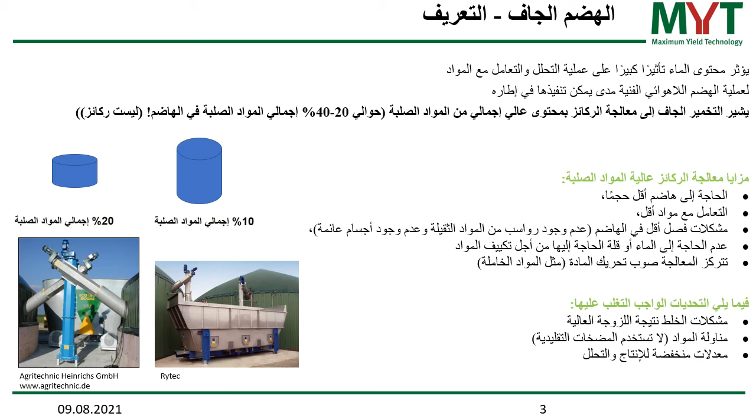Coming to the next slide, we have an overview over the two major technologies in dry digestion. The one thing is the so-called batch mode systems. Batch mode means you feed the substrate into a reactor and let it sit for the digestion time. The opposite of this is the continuous mode. In the continuous mode, you have a constant feed into the system and a constant output out of the system.

In the batch mode, of practical relevance, plants we have seen in a certain number in technical applications are systems with percolation. This is the so-called garage style digester. So you feed the substrate into a garage and percolate a liquid over it. The liquid trickles through the substrate and is recirculated again and again in order to enhance the anaerobic degradation

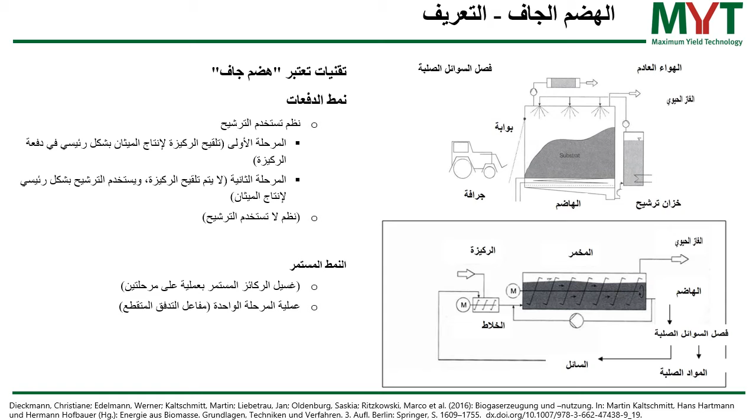Continuous mode, we have several relevant systems. Two-phase process with continuous washout of the substrate in a plug flow system has been developed, and I think there was a pilot plant, but it never came to a lot of installations in full scale. But the one-phase process plug flow reactor for organic waste, this is a very common system, and I will introduce that to you in following slides.

We have most common substrates. As I already said, total solid content is a very important point here. So mainly substrates with a high total solid content are used in anaerobic digestion, dry fermentation systems. Very common it is for separately collected organic fraction of municipal solid waste. So in many countries we have a bin in the households where organic waste is separately collected, and then this material has a high total solid content and can easily be digested in a dry fermentation system.

There is also an application, in particular in Germany, for a fraction of municipal solid waste. So there is a treatment of municipal solid waste. It's shredded and then it's sieved, and a certain particle size contains a lot of the organic material, and this is being stabilized prior to landfilling, prior to deposition in a landfill, in order to avoid biological activity on the landfill. And this organic material you also can digest, and dry fermentation systems are reliable technology for this biological stabilization.

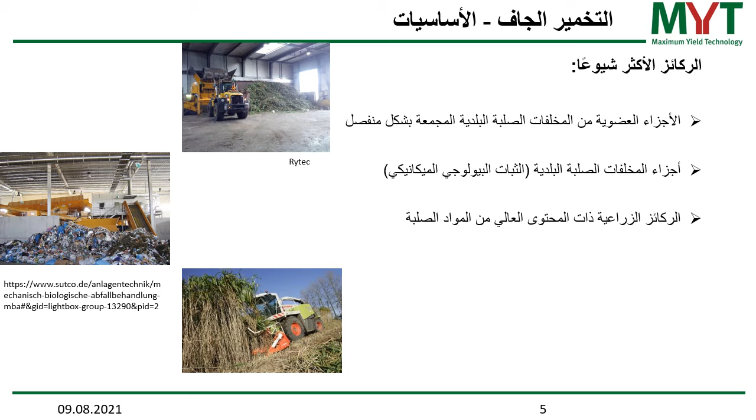Limitation of the total solid content is usually said to be around 40% total solids, but I would like to highlight here that this is not only the total solid content, which is then available in higher concentrations. There are also other substances which are in the substrate in elevated concentrations once you reduce the water content.

Last but not least, total solid concentration in the substrate and total solid concentration in the digester are two things. First of all, you have a degradation process which reduces total solid content. So you have a fraction of the organic material which goes into the gas phase via the biogas. So you lose total solid, which increases the water content.

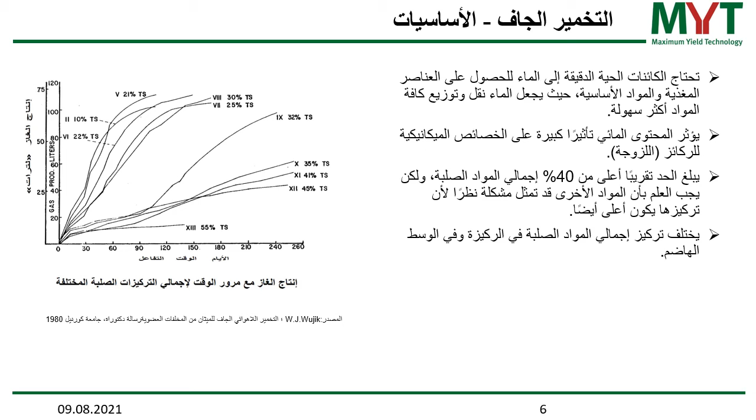On the next slide, I would like to show you also this fact, what I just mentioned, that also other substances concentrate if you have a low water content. One of these is the ammonia concentration. Ammonia is actually a degradation product of any organic nitrogen in the substrate. So any plant material, but also manures, contains organic nitrogen. And once this is degraded, it turns into ammonia.

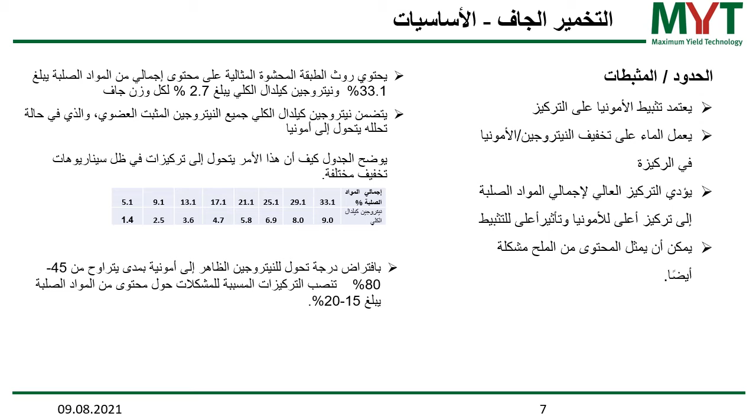Another point here is salt content. In some substrates we have concentrations of salt, and there you also have to check what impact dry digestion would have on this concentration and if this would result in inhibitory conditions.

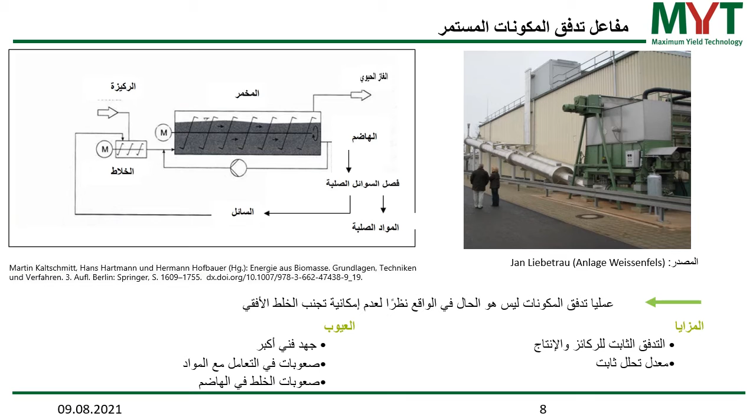You might also have issues with mixing the digester. There are several systems, therefore; if we look at the next slide, you can see that there are systems with the mixing on the lateral axis, and also a mixing system where the axis goes straight to the long side of the digester. And you can imagine that to keep such a mixing system really stable and not have a lot of movement of the system during mixing is quite a challenge for the process engineers. However, both have advantages and disadvantages. They are both available and tested in full scale, so I couldn't say that the orientation of the mixing system is a huge issue on these systems. It's just that there are two different systems available.

The material of the digester is also available in different systems. You can have them in steel or in concrete. The pictures you can see here, they are in concrete.

And usually these systems are operated in a very narrow total solid window. This is in order to avoid sedimentation processes. That's why the total solid concentration is kept quite high. And it shouldn't be too high, because then you get issues with the mixing, with the substrate transportation, and also with the release of the gas out of the digester medium.

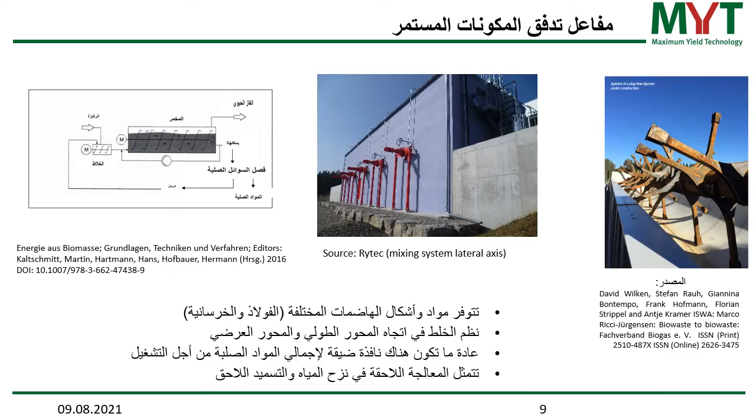When you look at the continuous plug flow reactor in regards of the relation of total solid content, hydraulic retention time, and organic loading rate, you can see that, of course, the higher the total solid content and the lower the hydraulic retention time, the higher the organic loading rate. Make sure that once you calculate that you consider your digestate recycling, or your recycling of the liquid fraction of the digestate after the dewatering process.

And other than standard chemical processes where you can put together the basic materials and then they react simply in such a plug flow reactor, the issue of a biological process, or in particular of the anaerobic digestion process, is that you need to have a mixture of methanogens in your initial feed in order to avoid acidification. If you have not enough methanogenic microorganisms in your substrate and you have a plug flow, then your digester would simply acidify, and this would lead to a collapse of the process.

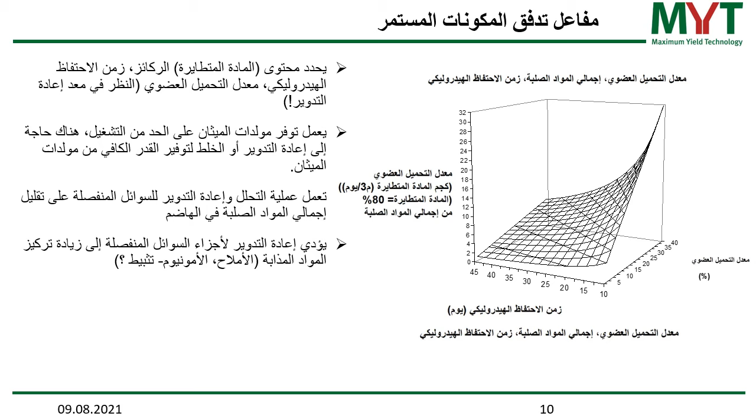If you have a recirculation process, you also need to pay attention to the fact that in the liquid fraction, then you accumulate dissolvable materials. This can be salts, this can be ammonia. You have to pay attention to that because it adds to the problem of inhibition, and that's why you have to check on this occasionally, and/or at the very beginning, maybe in the planning phase, you have to do some calculations how these concentrations actually increase.

Here we have a continuous plug flow system, an application which is offered on the market by the company Dranco OWS Systems. This is the only company who is offering such a system, because it's a vertical plug flow. The substrate is mixed with digestate and then pumped to the top of the digester, and is then sinking simply forced by gravity to the bottom of the digester, and it's taken out at the bottom. Then a fraction of it is removed out of the process, and the other fraction goes back to be mixed with fresh substrate and fed back to the top of the digester.

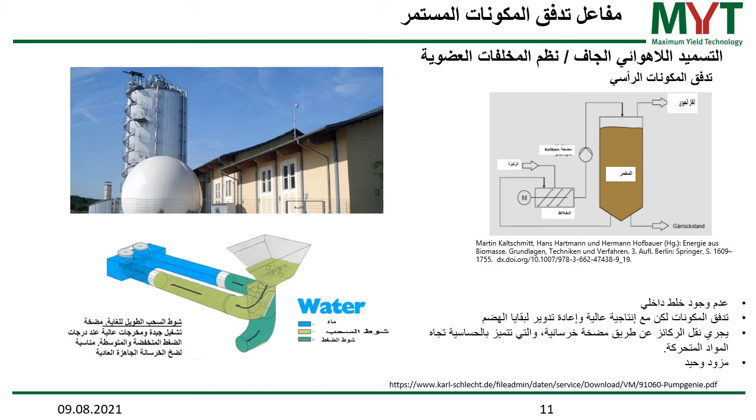There's no internal mixing in this process. There's a high throughput, simply due to the fact that you have to add digestate and fresh substrate. And the only substrate transportation is done by a piston pump. And these pumps, as I already said, are usually used for concrete pumping, so they are quite insensitive to disturbing materials. As already said, this vertical system is only provided by one company. There are quite a lot of applications worldwide, and this is, at least for my understanding, quite an interesting application here.

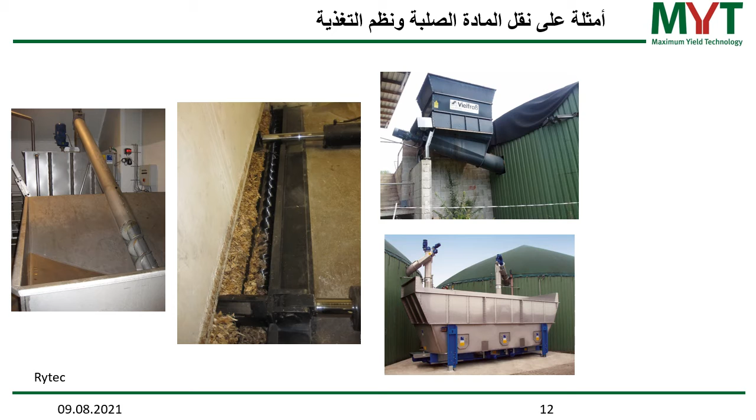The continuous plug flow reactor, to sum up a little bit and to give some general considerations here: we have substrate pumps to handle the material. This is quite a challenge. We have a high energy demand for pumping and mixing due to the high viscosity of the substrate. However, high total solid concentrations allow a high loading rate and then also a very high specific methane production rate

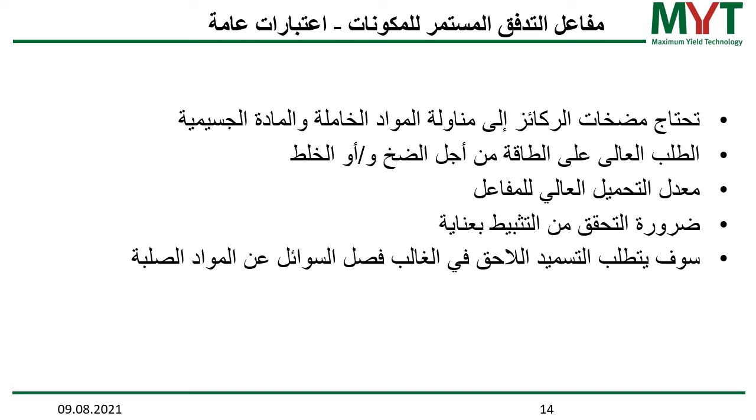from the digester. You need to check on inhibition, which substrates are in your substrate which might be inhibitory. And the post-composting will often require solid-liquid separation, so make sure that you have a plan for your digestate if you consider to build such a plant.

Second technology I wanted to introduce to you is the batch digestion system. As already said, the batch digester is fed to a reactor and then left for the digestion time, and this has the consequence that you have a discontinuous feeding, you have a discontinuous gas production, and you have a discontinuous output out of the system. So you need to make sure that this is considered for your overall plant operation.

So the substrate goes into the digester. It can be mixed with digestate, it doesn't have to be. However, it's fed to the digester, then the digester is sealed, then your percolation process starts, and in the first phase you have gas produced, which is mainly CO2, and this gas cannot be used. And of course you have a lot of air in the digester in the first place, so you have a gas where you have to consider what to do with this.

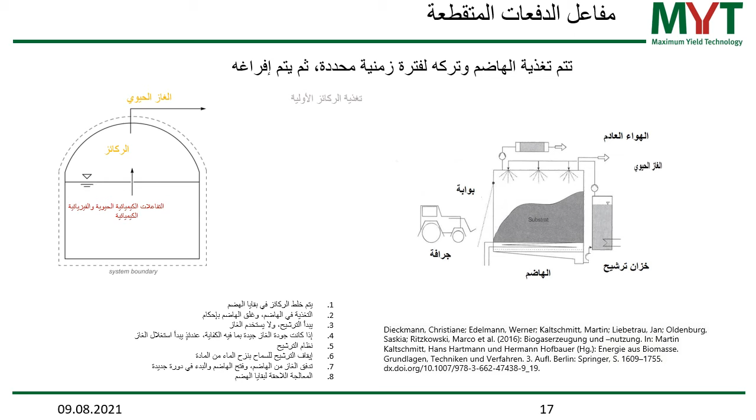Advantages of this system: it's a very simple system. You need a wheel loader and several garages in order to treat the substrate. Consequently, the technical requirements are quite low. This also means you have lower investment costs. You have a defined and guaranteed retention time, so there's no mixing of the substrate and maybe short circulation out of the digester, so every particle is a certain period of time in the digester.

Since you transport your substrate only with a wheel loader, there is no problem with any disturbing materials, stones, metals, whatever, no problem. And you also can separate substrate batches. So once you have maybe inhibitory substances in one batch, or you have some toxic substances in a batch, the problem will usually only occur in this very specific batch. The other garages won't be affected by such a problem.

Disadvantages: you have no continuous flow of the input material in biogas, so you have to store substrate, you have to wait until you can feed it in, so there's no continuous processing. You don't have a perfect contact of microorganisms and substrate as in a fully mixed system. You have reduced mixing, and you have also only limited opportunities to control the process.

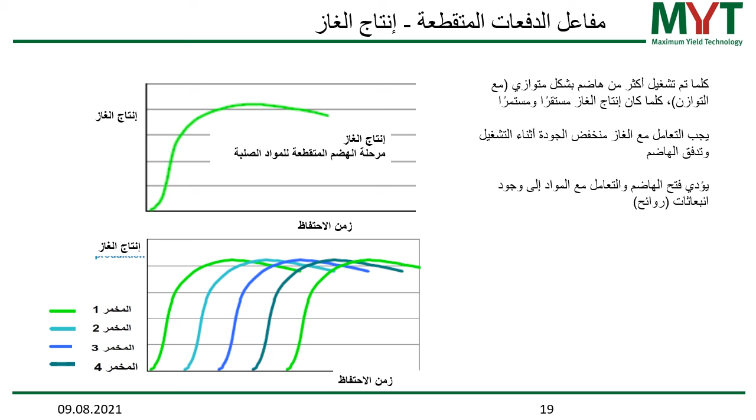As already said, the handling, opening up, closing of the digester leads always to gases of lower quality and might also lead to emissions from the process.

To sum up with the selected technical details here on the batch reactor, any substrate has a certain water holding capacity, and the percolation leads to a certain uptake of water until this water holding capacity is reached, and then the water is not stored inside the digester, it's percolating through. So make sure you have an idea how much water your substrate will take up before it starts to give away the water again.

Structure material is needed in order to have an effective percolation. So only if you have a certain, stable porosity, then the liquids get through. And make sure that compaction by the weight of the substrate itself is not too high, and that the liquids are getting through.

Technology options you have from certain providers usually vary in the size of the percolation tank. So either the percolation strategy is to remove acids as fast as possible, or the second strategy is to enable methane production as quick as possible in the digester. Some technologies also include aeration and composting in the garage. Again, make sure that your substrate characteristics and your structure actually allow such a processing.

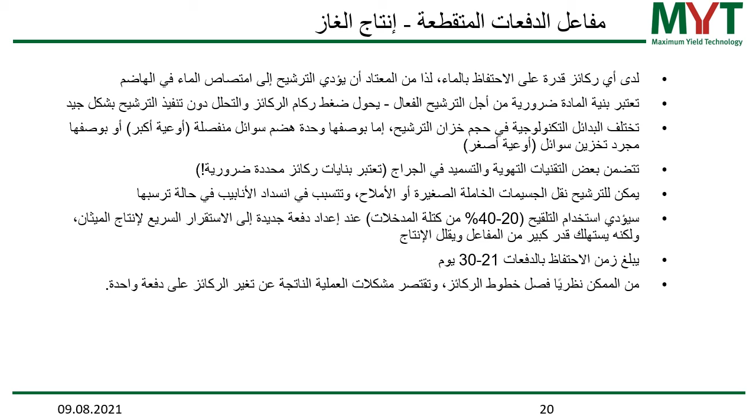Batch retention time is usually 21 to 30 days, and theoretically separate substrate lines are even possible, and the advantage I already mentioned is that process problems resulting from substrate changes are limited to one batch. There are many providers and process variants with different percolation strategies.

This technology is only applied within the treatment of separately collected municipal solid waste. And in the agriculture sector, this technology is not very common, simply due to the fact that you can treat these agricultural substrates much easier in other systems.

Post-treatment of the digestate is usually post-composting. There's not always a dewatering step necessary, but you might think of adding some structural material after the anaerobic digestion process.

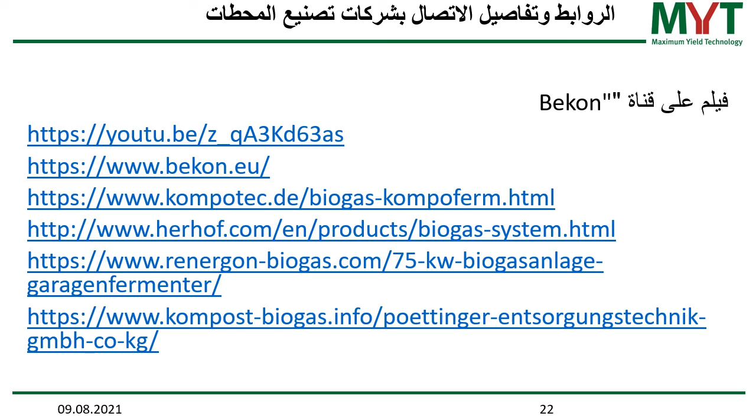And Bekon is one company; Kompotec, Herhof, as you can find here, are all providers of these systems. Pöttinger, yeah. So if you are interested, feel free to check out these links here.

Post-treatment: as already said, dry digestion is closely linked to the post-treatment. Usually in Europe, the standard treatment of organic material in the past was composting, and consequently most of the systems today are a combination of anaerobic digestion and composting processes. And that's why the main post-treatment process for anaerobic digestion is also composting.

And composting can be used for hygienization, because you reach temperatures above 50 degrees in a compost heap if it is well operated. And then you have the necessary hygienization of your substrate, of your digestate. You have also a certain water reduction due to the convection of air through the compost heap. Due to the temperature, water is actually forced out of the compost heap.

But you, of course, need to have structure, and you have to make sure that oxygen is getting into the compost heap; this is an important factor here. Otherwise, you will simply continue to have methane production in the composting heap, and that would lead to very high emissions, which has already been proved by some research activities. Afterwards, composted material is usually sieved, and then you have a high quality compost.

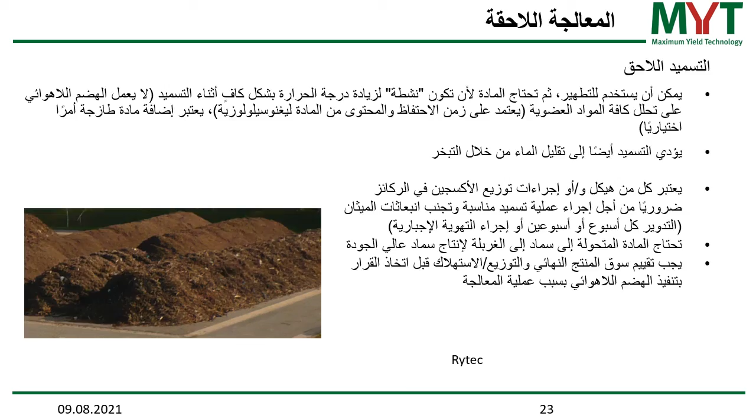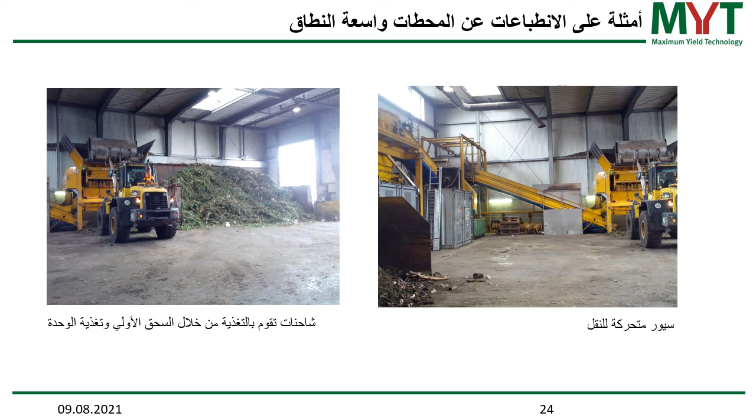However, the quality of your input material into your digestion process rules the quality of the output material. So the cleaner your input material is, the cleaner your output is. So the major target should be to really reduce disturbing materials in the input material.

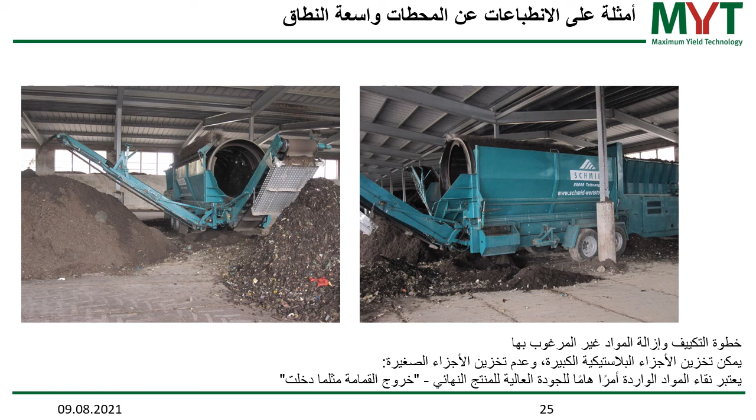Again, we have some impressions of some full-scale plants here. You also can find them in this brochure from the German Biogas Association. I don't want to read all these details here. Please check out in the brochure or here on the slides the major conditions.

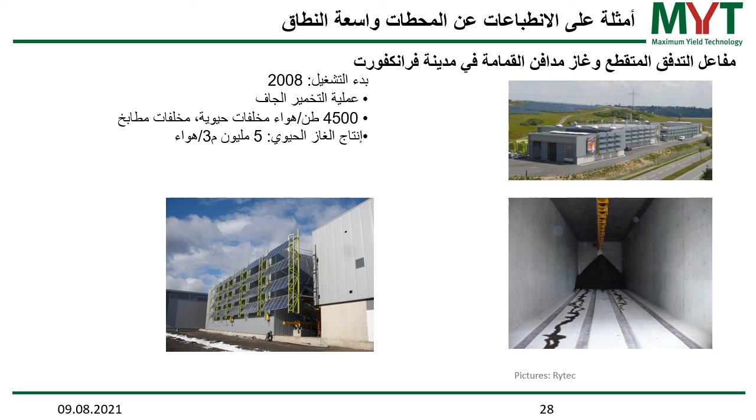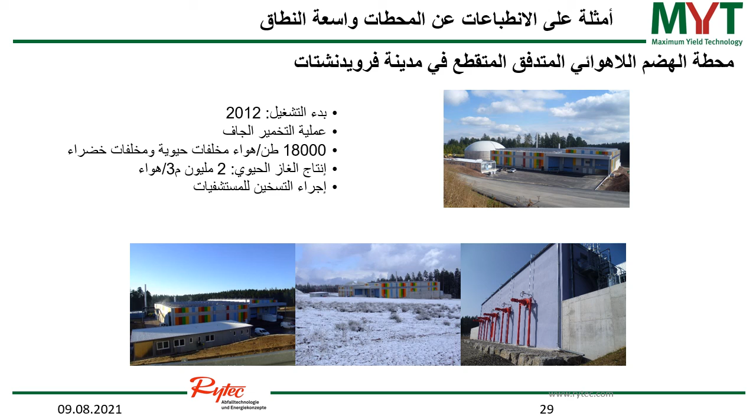Finally, to the conclusions of the dry fermentation process. It's an appropriate technology for high solid containing waste materials. It reduces mass, but you have to consider that reduction in water content leads to higher concentrations in total solids, in potentially inhibitory substances. Disturbing and unwanted materials can be handled by most technologies. That's why this technology is favored for substrates out of the municipal solid waste sector. So it can be separately collected organic waste, but also pre-treated municipal solid waste.

There are two major technology lines: the continuous and the discontinuous operated processes. The quality of the input material rules the quality of the output material. This is something to be considered in the planning phase, and of course it's very important for the market for your end product, and also the quality of your compost at the end.

So make sure that you consider during the feasibility and the planning phase what quality your input material has, what gas yield you can expect, and then what market there is for this material.